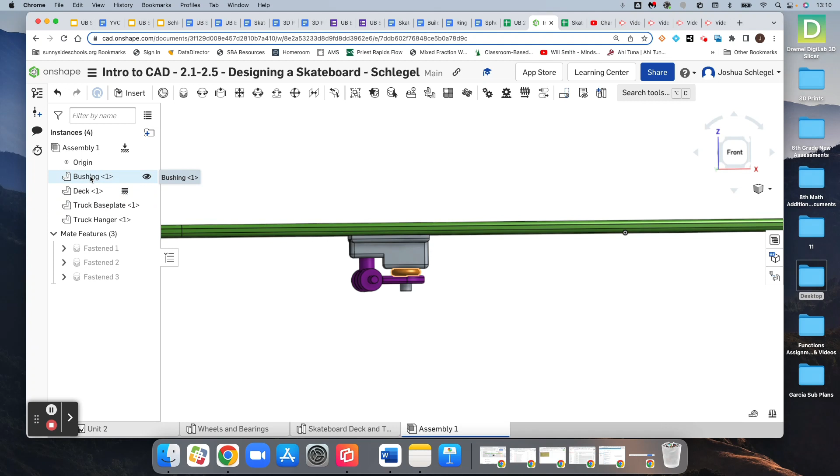Okay, so we've got all those parts assembled together, and now we just get to do all that over again and create a whole new truck and base plate and all that stuff. Just kidding. What we're going to do instead is, now that we've created those things, we can come here. We need the bushing, we need the truck base plate, and we need the hanger. We're going to take those three things and copy them, and then paste them.

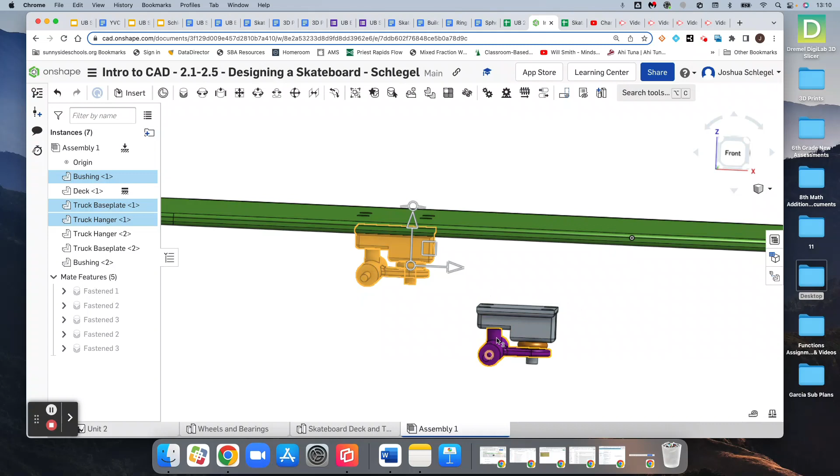So now I've got a whole new set of truck base plate and hanger and bushing and all of that. That was way easier to do than it was to recreate this entire part all over again. So I hope that you didn't take the time to do that as we've been going through this process.

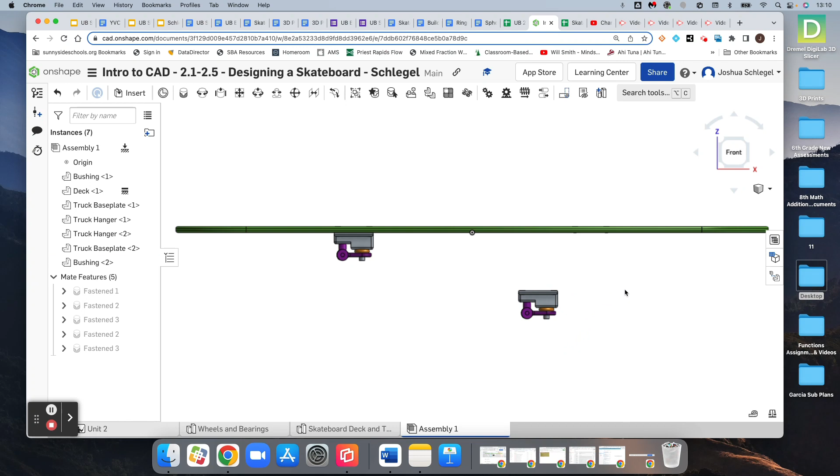So that being said, we've got this piece now, and see how it's free, it can move around. This piece is not free and able to move around because we have mated it to the skateboard. What we want to do is do the same thing with this piece. We just got to be a little bit careful because we want this one to face the opposite direction compared to the other end. Like, we want this thing on this end, not in the middle.

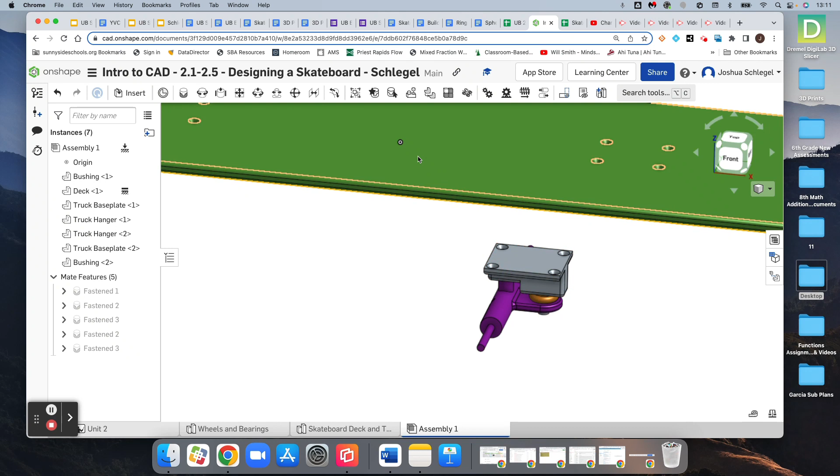And so as we do the mating for this one, we want this hole to mate with this hole, so backwards of each other, right? So let's give it a shot. Get our mate tool. We want the top of that hole on the bottom of the far side of the skateboard.

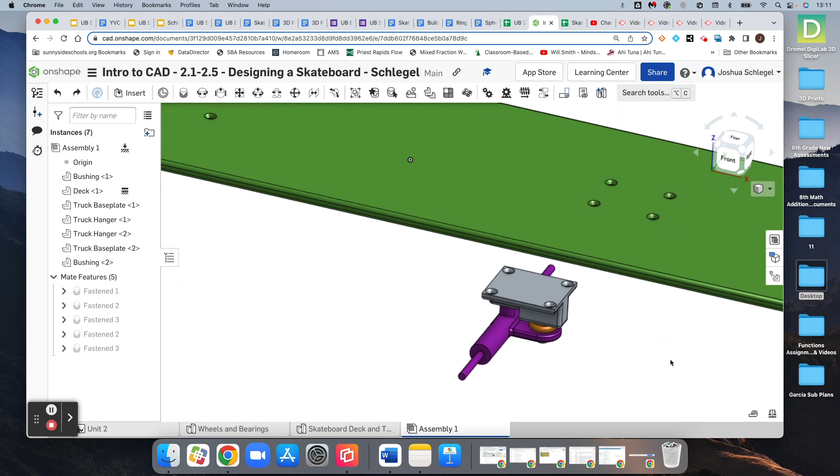Oops, and I did that wrong. That's not where I wanted. Let's try again. Let's give it another shot here. So, oh yeah, that is what I want to do actually.

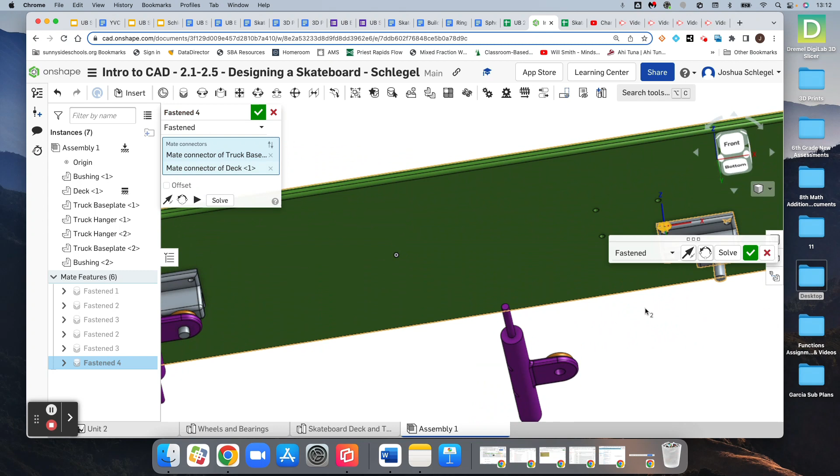But now I've got to spin that thing around somehow to get it the way that I want it to be. So the way to fix what just happened is, when we make the mate, I still need to mate this hole to this hole. But I notice now that it's not facing the direction that I want it to. I want it to be spun around the other way. So I can click this button, which is the reorient secondary axis button, to get it spun around to face the way that I want it to.

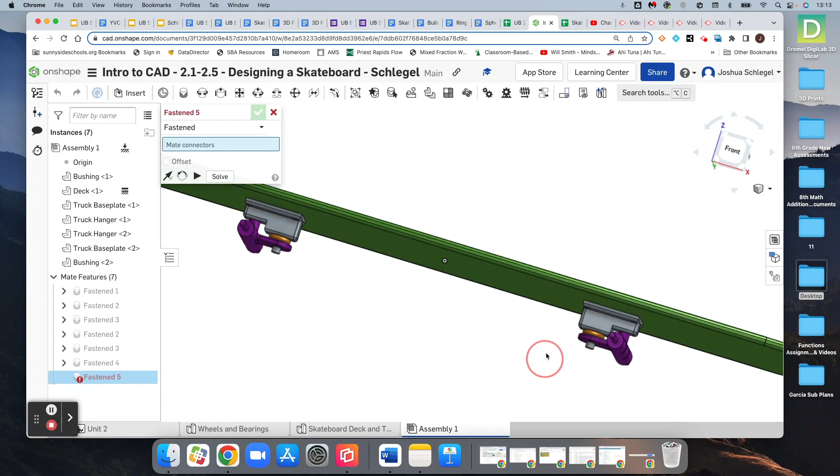Now we can see that my purple thing is on the outside here and the outside here, and everything looks as it should be. This is turning out to be one sick looking skateboard.